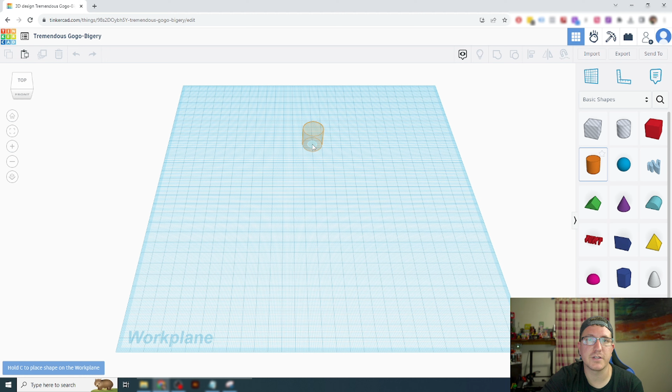So if you click on the cylinder and place it on your work plane, you're going to see that it's a cylinder shape, but it's not actually a circle. It's a circle with a bunch of straight edges. That's all fine, but I don't really like that. I want an actual circle. So we're going to get rid of that.

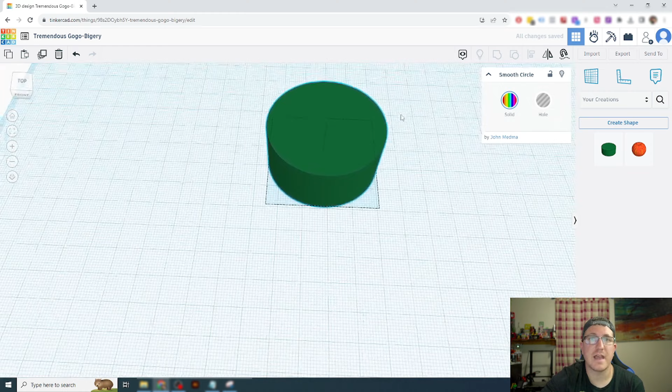I'm going to go over here and click on basic shapes, and go to my creations. I created a smooth circle that I use instead of a cylinder to create my keychains. I will provide a link in the description of this video for you to download this smooth circle shape

so that you can use it when you create your keychain if you'd like to. Okay, so the first step is going to be we need to make the keychain the size that we want.

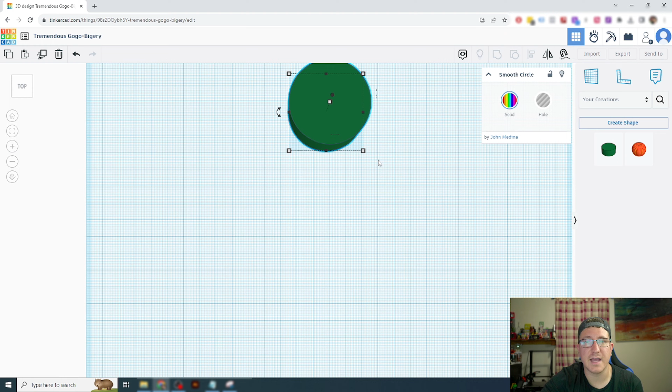I've found over time that I think the perfect diameter for a keychain is about 2 inches. Now Tinkercad uses millimeters, not inches, but if you go to Google and type in millimeters to inches, it's going to give you a little calculator that you can use.

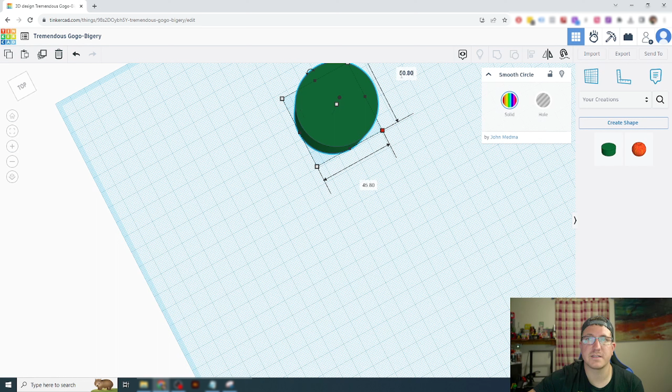So I've already done that, and 2 inches is about 50.8 millimeters. So I'm going to click this corner right here, and you see these two little boxes come up. I'm going to change this to 50.8 on both of them, and it's going to now change the diameter of my circle to 50.8 millimeters, which is 2 inches.

The next thing you'll notice is that this is pretty thick. That's like a hockey puck thickness. If we were to print that, it would not be super comfortable in our pocket. So we're going to change the height of it.

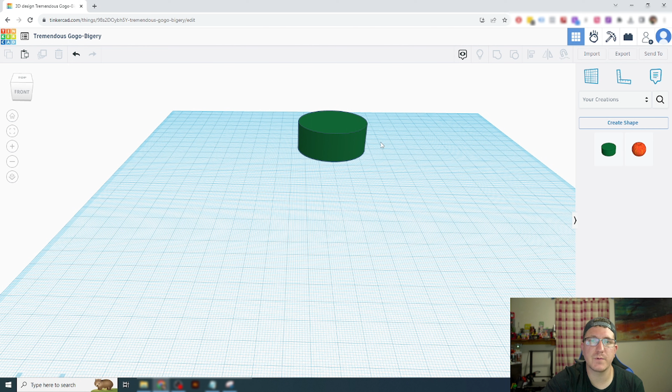Now I like for my total height to be about anywhere between 3.5 and 4 millimeters. So I'm going to click here, I'm going to click this little square right here. That gives me the height. So right now this circle is 20 millimeters in height, and I want it to be between 3.5 and 4.

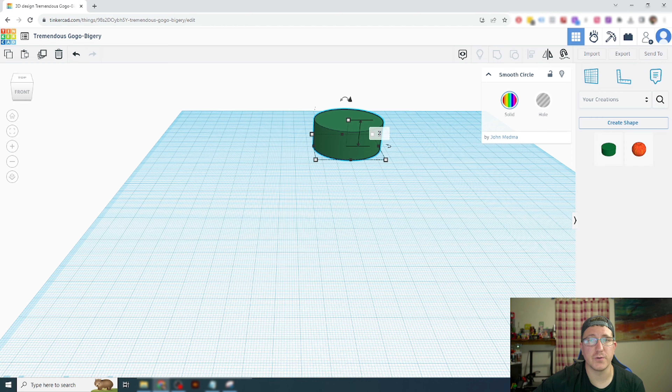So what I'm going to actually do is make this 2, and the reason why is because this is the base layer of the keychain. We're going to put another layer on top of it that's going to have our shape, so it's going to kind of have a 3D ridge to it. Now there's another way that you could do this.

Maybe I'll cover that in another video, but that would be where you embed the shape inside of the keychain. I like to make mine where they're 3D, so the shape that we're going to put in here is going to go on top of this and become part of the keychain.

Once you've got your circle set and got the right size, you're going to import whatever image you want to put on top of the keychain. I'll include a link in the description to the image I'm using, but you can also just go to Google and type in whatever you want, then put SVG, and find a file in SVG format.

So I'm going to click import, and then go grab the file. For this one, I searched Rebel Alliance logo SVG, and this came up, so I downloaded it. Now, if you're going to sell these, be careful because a lot of this stuff is copyright protected. I'm not going to sell these, I'm just making it for me, so I'm not worried about copyright protection. I'm not a copyright lawyer, but keep that in mind before selling something like this commercially.

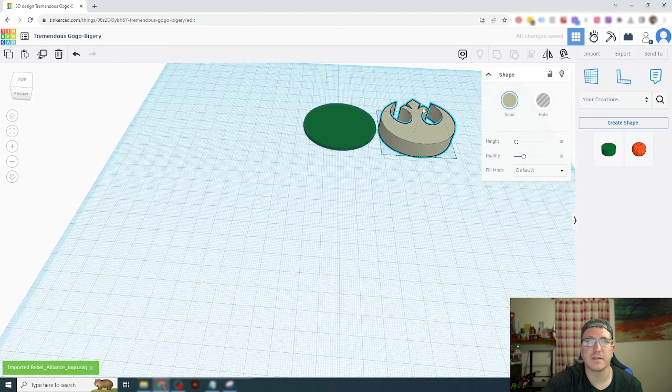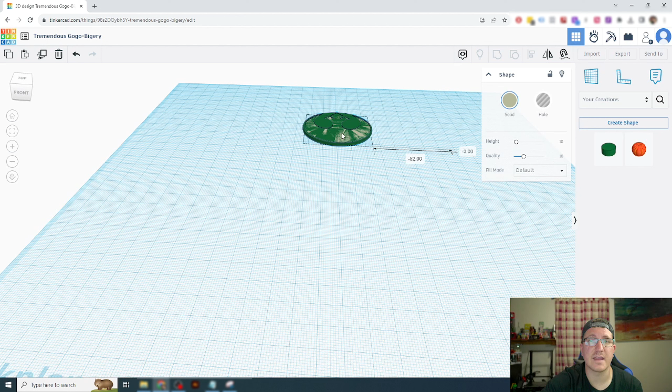Now it's loaded that shape. Again, the height of this is 10 millimeters, so way too big. I want mine to be between 3.5 and 4 after it's all said and done, so I'm going to change this to 2, which would make a total of 4. Now you'll notice if I drag it over here, it kind of disappears because it's 2 millimeters thick and the base is 2 millimeters thick too. We could just make this 4 millimeters thick and move it over, but instead I'm going to click this cone shape and move it up 2 millimeters.

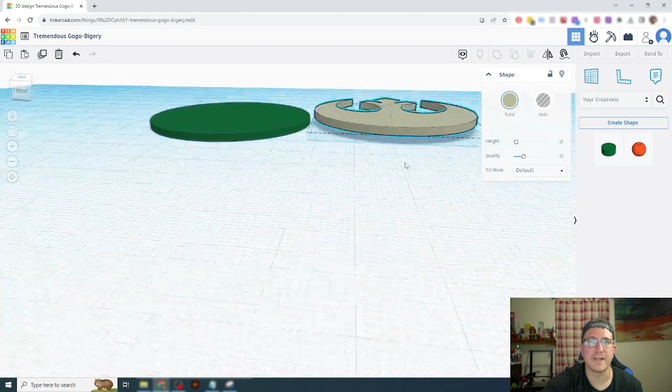So now if we zoom in, it's off the work plane by 2 millimeters. I'm going to drag it over here, and that kind of looks good, but I'm not sure. So instead of trying to guess and not actually have it centered, there's an easy way to center it.

We're going to click off of it, then select both of our shapes. We can do that by dragging and selecting both, or by clicking one, holding shift on our keyboard, and clicking the second one. Once we've got both selected, we'll see this option which says align. We're going to click that, and these lines come up. The center ones will align it horizontally and vertically to both shapes. So we click that and that, and now we've got it perfectly centered, and we don't have to worry about it not being the shape we want.

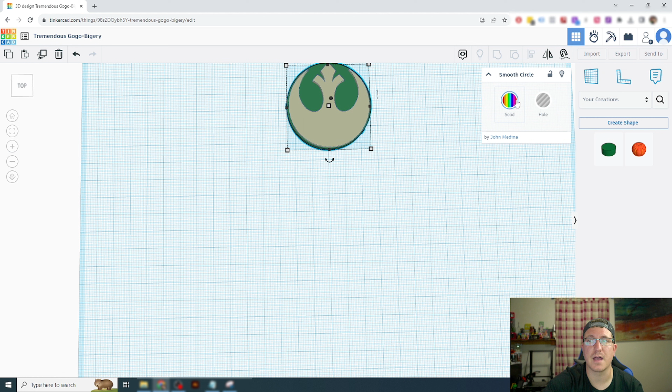I think it looks pretty good, but I want to see what it would look like in the actual colors I think I'm going to print it in. When you click on a shape, this option comes up, so we can tell it what color we want by clicking here. I want it to be black, so I'm going to change that to black. I like that a lot better.

Now this I want to change to red, so I'm going to click that solid again, and I'm going to come over here and find a shade of red that's pretty close to what I've got.

So now we have the full keychain ready to go, except there's one problem. If I were going to print this as an actual keychain, I have no way to connect it to a keyring. So to do that, we're going to go over to our Your Creations section.

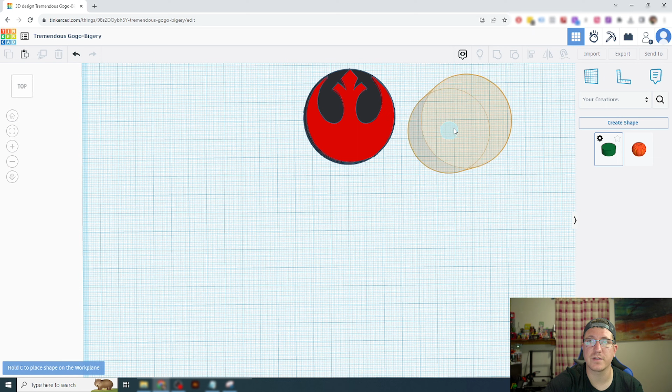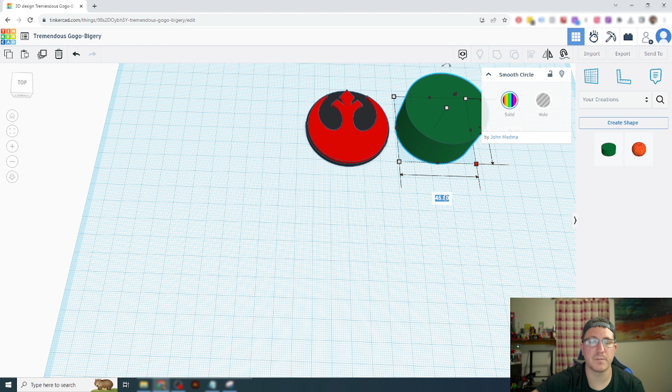We're going to grab a smooth circle again, place it here, and resize it because that's way too big in diameter—that would ruin the entire keychain. You can mess around with the size if you want, but I've found that 4 millimeters by 4 millimeters is big enough to fit a keychain through it, but not so big that it takes up too much space.

So now we've got that done. We're going to put it where we think we want the keychain hole to be. You could put it here or here, but I'm going to put it right in the center. And once again, I'm not sure if that's actually the exact center.

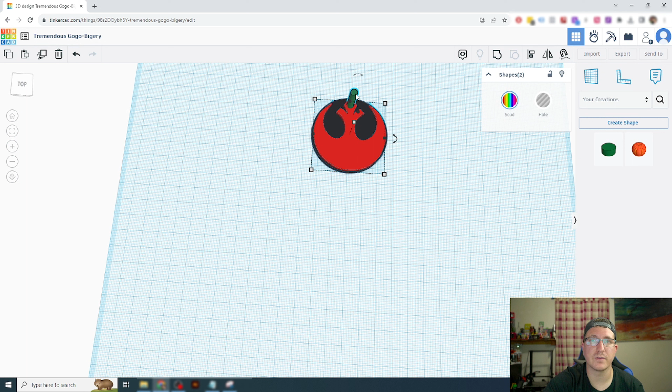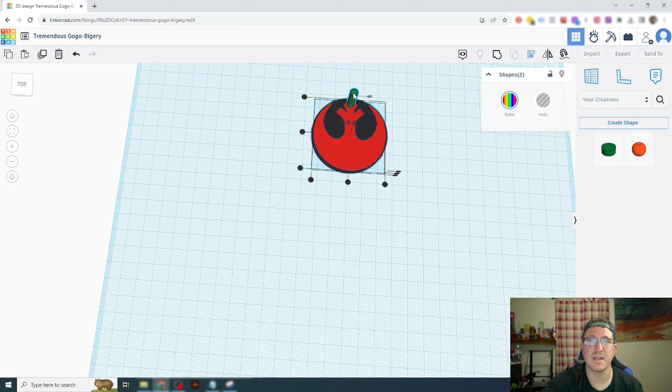So an easy way to do that would be to select the Rebel logo and then select the cylinder by holding the Shift key. Now we want to only move this based on that—we don't want to move them together, or it will get out of sync with the base. So if I click the Rebel logo again, it's going to reference this shape to where that's at, and this will not move. So I'm going to do that, and then hit this to center it.

Now see how just the cylinder moved when I did that? The base shape did not move. Okay, so now that's where our hole's going to be, but our hole isn't actually there.

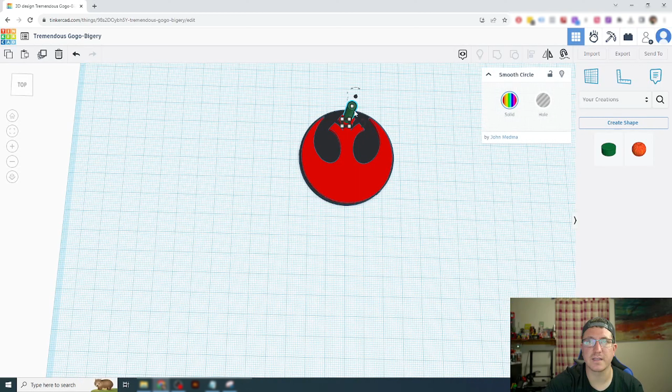So to fix that, we're going to click the cylinder again, click the hole button, and now this shape is kind of grayed out, grayscale, as you can see. That doesn't create the hole, but it helps us visualize where the hole's actually going to be. Now there's one problem here with this.

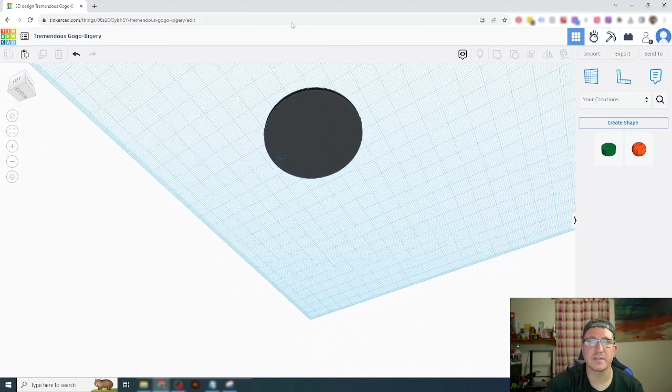If I go to the underside, you'll notice you can kind of see it, but it doesn't actually look like the hole's there. So to fix that, we're going to go back up here.

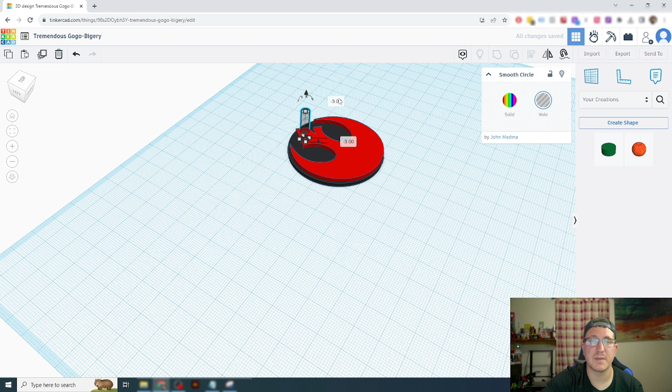We're going to click on the cylinder, click our little cone tool again, and just drag that down a couple millimeters. Now you see this little box here says -3, that means we've gone down 3 millimeters. And now if we go under here, you'll see that it has now gone through the work plane.

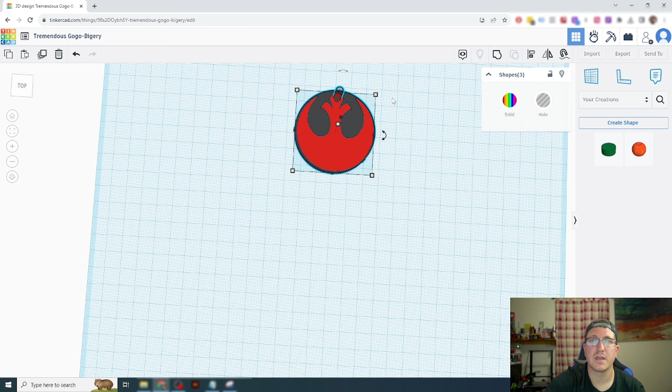So that means it will now create a hole once we do the final step. The final step is going to be to select all of the shapes, and you click this button, or you can hit Control-G on your keyboard, and it will group them together and actually put the hole through the keychain. See how there's a hole there now?

All right, and that's it. You've now created a keychain that is pretty much 3D print ready.

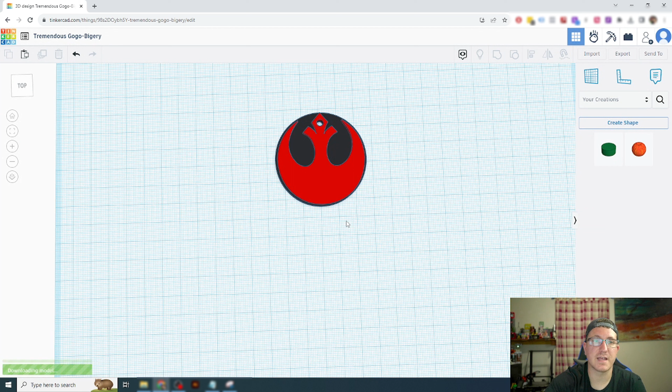So the final step would be to hit the export button, and then you're going to want to export it as an STL if you're going to plan on 3D printing it. So you just press that, wait for it to export, and then it will download to your computer.